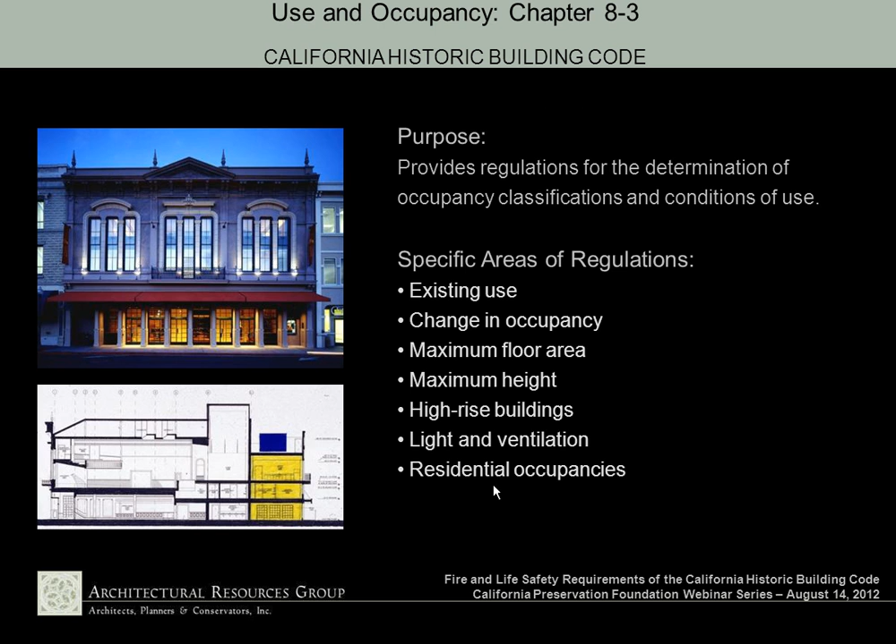Chapter 8.4 is fire protection, and the intent of this chapter is to look to the life safety of occupants in terms of fire separations, rated walls, and that sort of thing. And the specific areas, perhaps the most important, have to do with requirements for fire resistive construction. These are made much more flexible, both in terms of exterior wall requirements and the requirements for 1 hour construction.

1 hour construction can generally be not required, provided that there's an automatic sprinkler system installed, that there's an approved life safety evaluation to evaluate the actual safety level of the building, and that other alternative measures are approved by the enforcing agency. In other words, the fire resistive requirements that would be required by regular code can be adjusted based on evaluation and concurrence with the enforcing agency, provided there is an automatic fire suppression system. Similar flexibility related to openings in fire-rated systems.

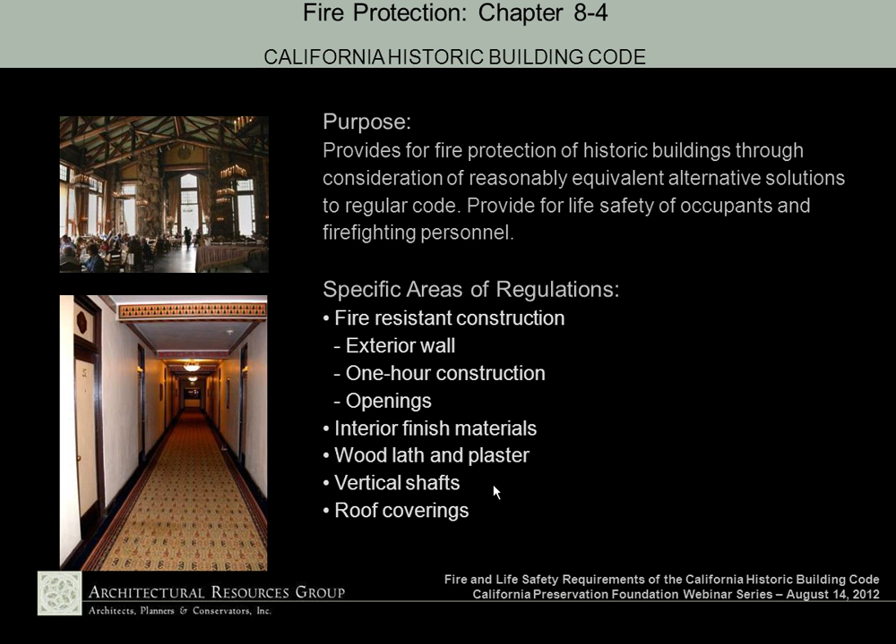There is another section, actually referred to as other technologies, and this is an important element because we've gotten much more sophisticated in our ability to model fires and to do computerized modeling of egress paths and patterns. And the code recognizes the use of these technologies as a way of understanding how the building will actually perform when it's burning or when people are trying to get out of the building.

So in situations where you have some sort of unique characteristics to the building, the code will recognize some of these other methods for analyzing the hazard. Recently, we were able to use fire modeling systems in looking at the Ahwahnee Hotel. And while they didn't actually change the ultimate solution, which was to pretty closely meet requirements of regular code, it did provide quite a bit more information about how the building was going to perform in a fire. So these technologies are important to think about as you work on historic buildings.

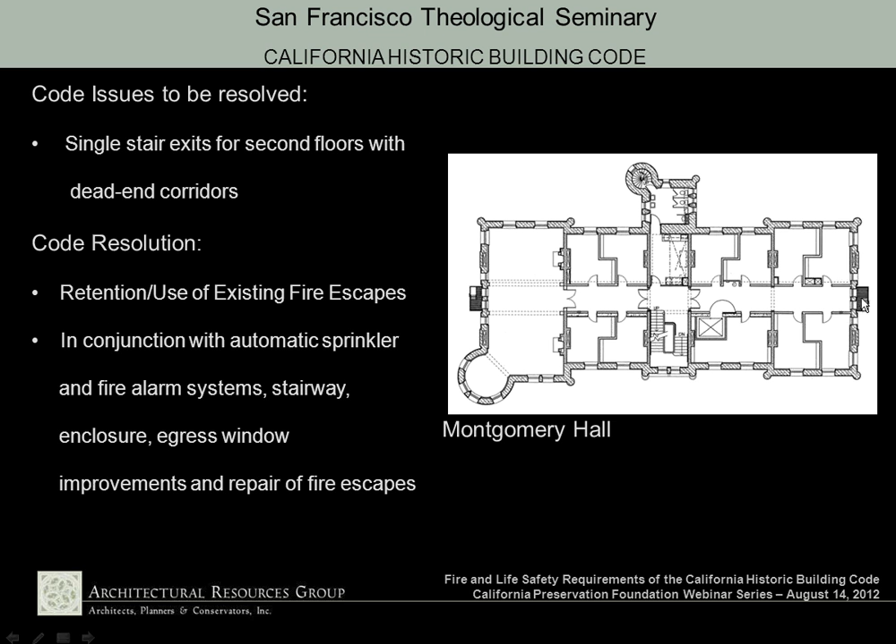add enclosing doors on magnetic closers, which would allow the main stairway to be enclosed in the case of a fire, and add improvements to how one got on and off of this fire escape.

So these are the fire escapes. They're pretty nondescript. It would be nicer if they weren't there, but our opinion ultimately was that this was actually the best solution for the building in terms of both historic fabric and life safety, and actually not incidentally cost.

The corridors had wood wainscot. These are doors on magnetic hold opens, and at the end of the corridor are two double hung windows. One of the windows was reworked to be a casement operated door. We kept the sill at the sill height, added exit signs, and this provided an adequate means of egress to the fire escape.

In conjunction with that and the enclosure of the stair was treatment of the guardrail, adding a freestanding guardrail extension and adding code-compliant handrails to the outside walls.

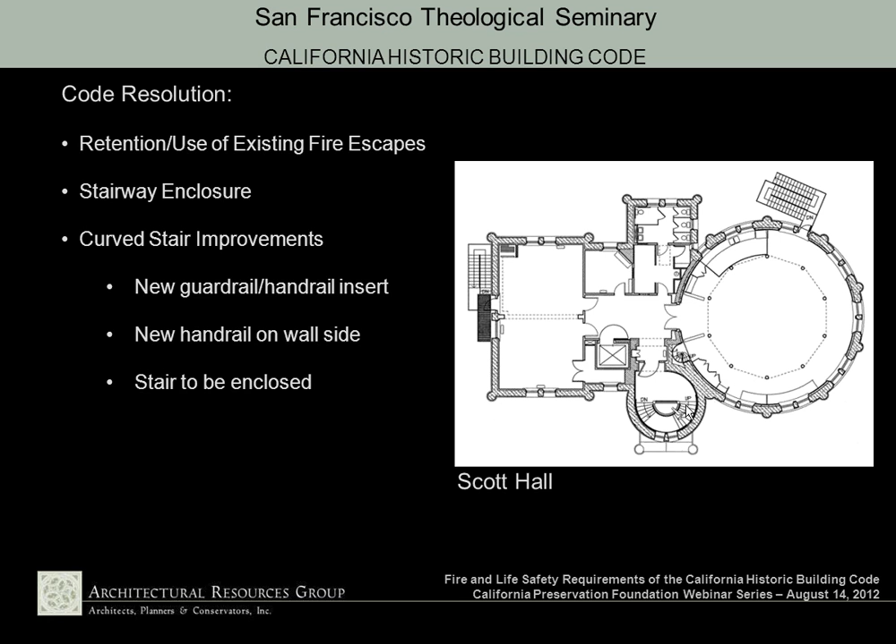We chose to leave them in place. In fact, they provided exit capacity in the right locations. And then enclosed the circular stair again with a magnetically held open door, full sprinkler system, full fire alarm system, and then improvements to the guardrails and handrails to make the stair a safer path.

This is a view of the assembly space. It's actually a student lounge. And the changes that were made to one of the windows to allow for access to the fire escape stair. And the curved stair itself went up 2.5 stories.

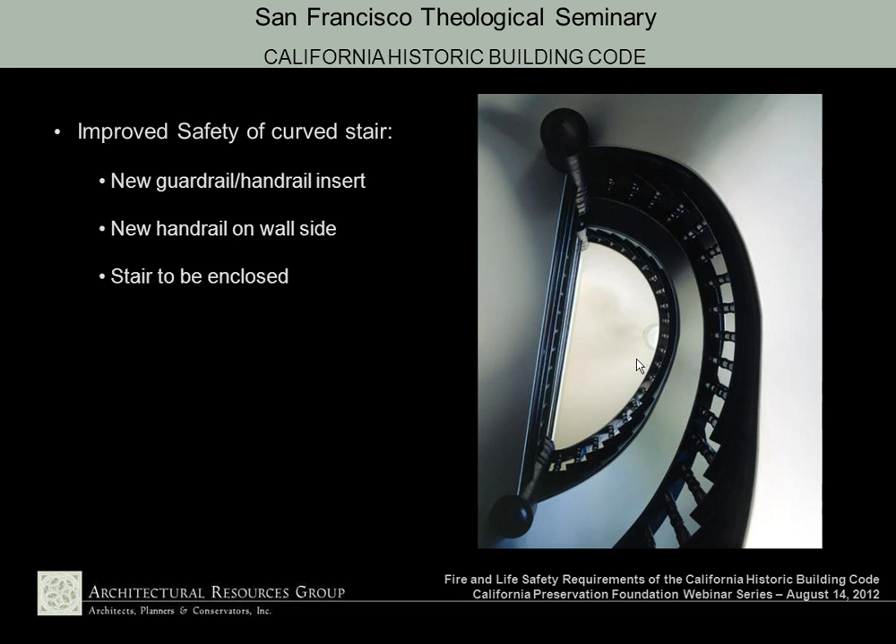And again, a freestanding guardrail extension was added inside the historic stair. So the historic balustrade was essentially unchanged, and a new handrail guardrail was added, which traces the path all the way down the curved stair.

This will be a similar story. Another project which really began with a seismic strengthening requirement. We really saw a number of very serious other code issues having to do with unenclosed open stair and egress corridors, as well as guardrail issues.

This is a plan view. So there was one open stair at one end of a long double-loaded corridor, and then a second stair 3 stories high. Some of the requirements decided on were to, again, enclose the stairways with doors which could remain open on hold opens until the fire alarm required the magnetic closers to close.

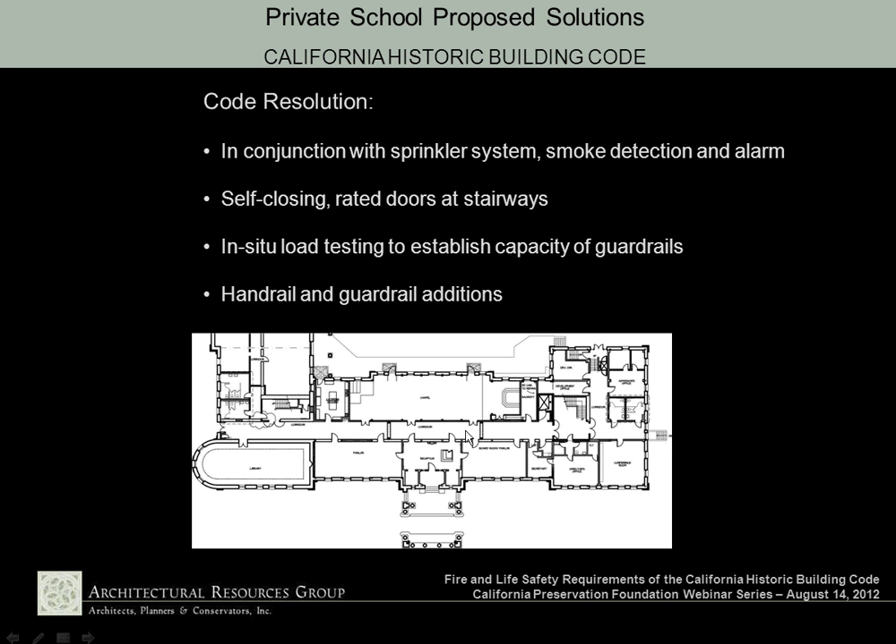This is an interesting story of the guardrails. I'll get to the photograph of that in a minute. And then making the guardrails and handrails safer. And then looking at how to treat what would normally be a fire-rated corridor.

This is a view of the stairway itself and the new doors on hold opens leading down the corridor. And here's the stair.

The corridor itself, and this is a fairly standard type solution, very beautiful corridor with glass transom windows, glass in the doors themselves. In the past, to make a 1-hour corridor, we would have ended up taking off the plaster and sheetrocking, taking out the doors and putting in rated doors, and taking out the transoms.

The State Historic Building Code allows these doors to remain as long as they are on self closers, and the transom windows are fixed shut. And the idea here is that the flame spread is not so much the issue because you have a fire suppression system, but smoke is still a big problem moving through the building.

And so it's important that these openings, while you don't necessarily rate them, be closed or be on closers. So that's a fairly common solution now under the State Historic Building Code for the requirements for rated corridors.

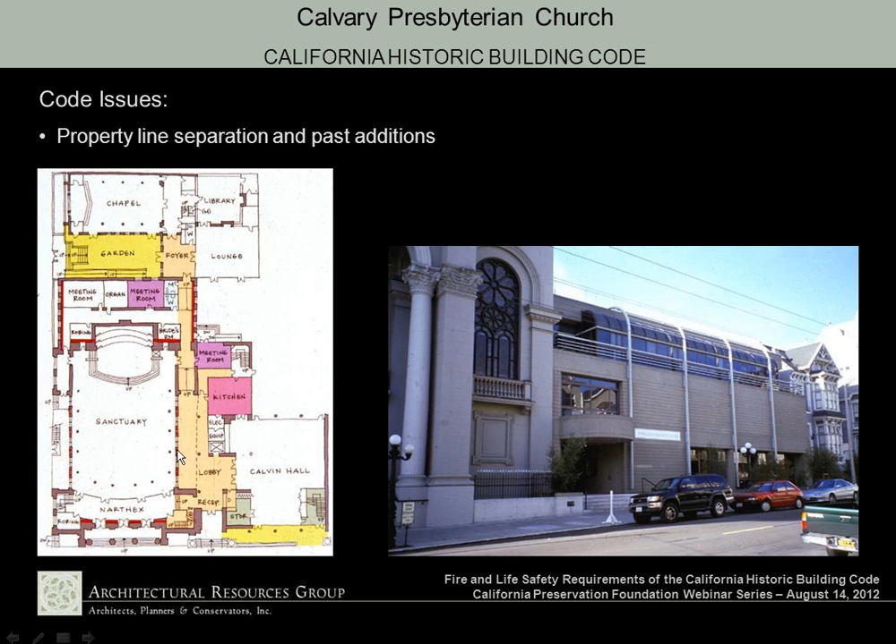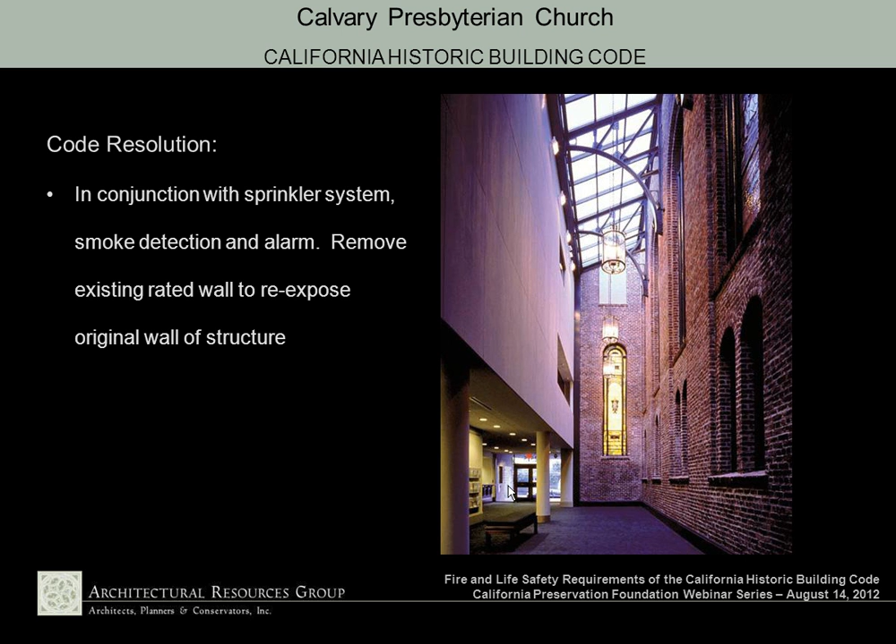Oh, I keep forgetting. I got more and more of these.

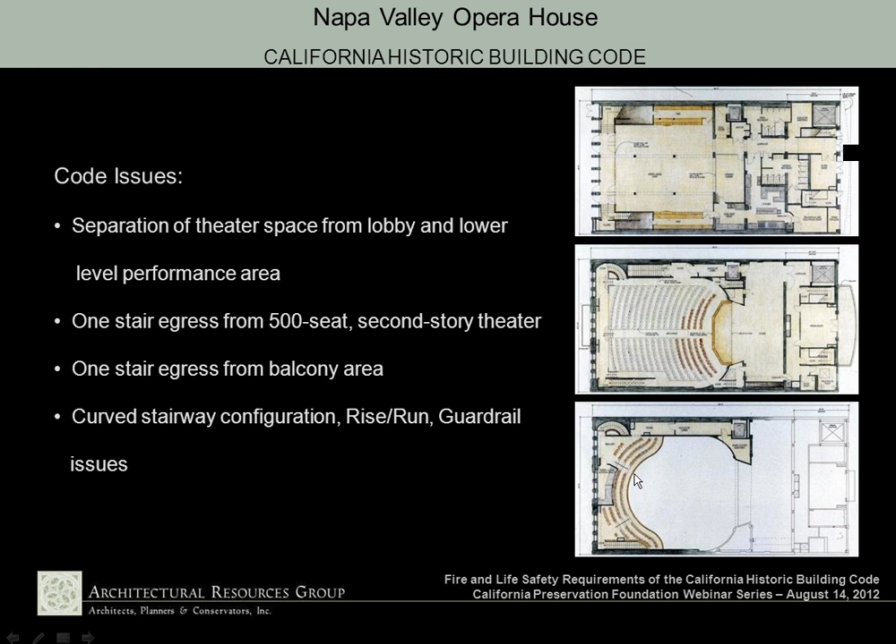Some things, this is where I was talking earlier about the comprehensiveness of some of these solutions, we really had to separate acoustically this performance hall from everything around it, but especially from the lower level lobby. So the process of making an acoustical separation, which is done in this case with several layers of sheetrock, allowed us to create the 1-hour barrier. Of course, everything was sprinklered.

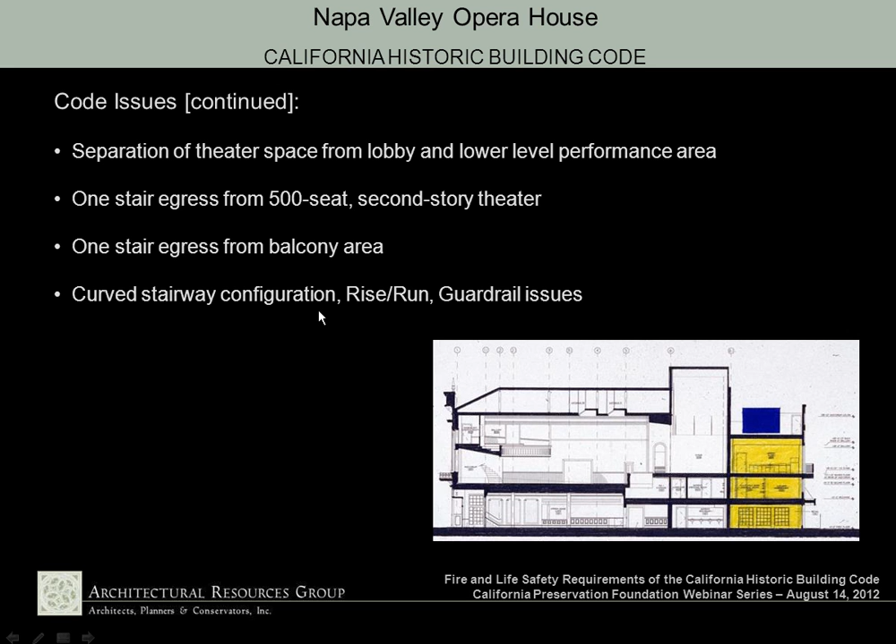We added a second means of egress, both from the balcony and a new egress stair from the hall. So in those areas, we really did not rely on a lot of flexibility from the State Historic Building Code. We really looked to create appropriate means of egress to augment what was there. And then reworking the curved stair so that it could still serve its function, but do it in a more safe manner.

A few other things. The original two-story stair, we needed again to do this acoustically as well, we had to have doors from the theater space into a lobby and then a second set of doors to get into the stairway. Actually, that's at this level, coming down. A second stair was added in the back of the theater that would come all the way down and egress through the main lobby and out into the public way. And a second stair also from the balcony level.

So even while we used the State Historic Building Code, because of the assembly occupancy, because of the number of occupants, and because of the tenuous nature of some of the egress systems, there was a fair amount of upgrading in this project.

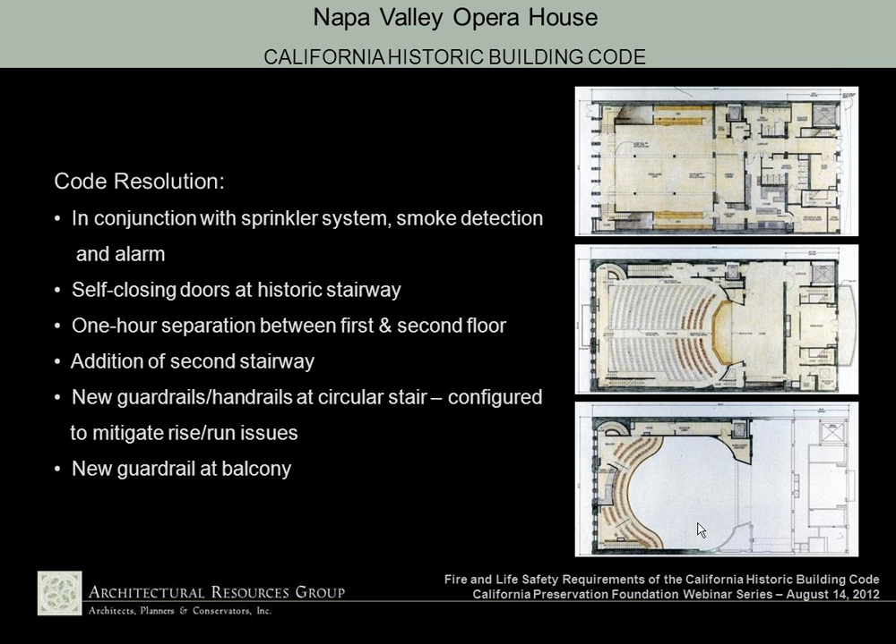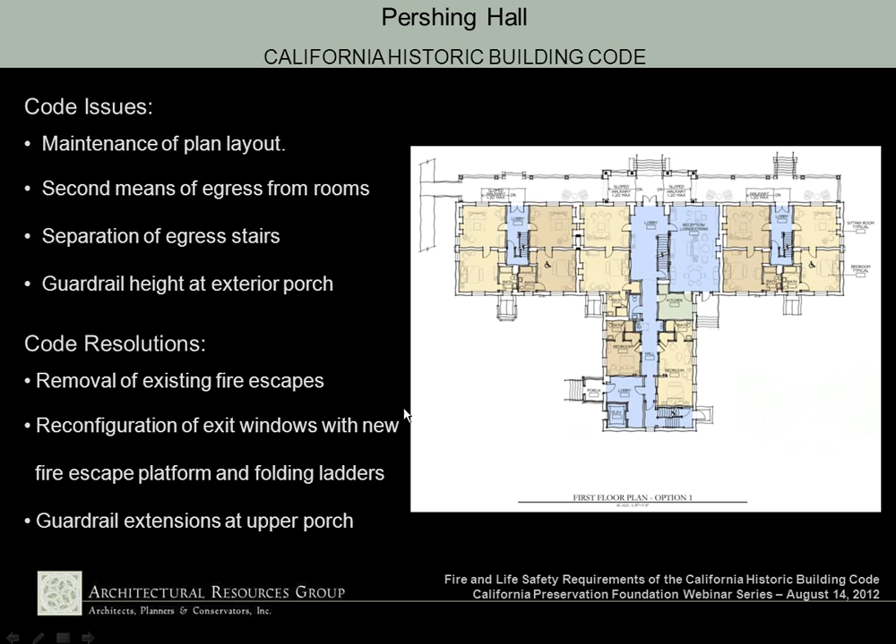One of the owner's programmatic requests was to get rid of that fire escape on the front facade and to rethink the ladders that existed in other parts of the building to provide a different form of egress. And so we removed the existing fire escapes and then rethought another way of egressing from the upper rooms.

And this is the rethinking that ended up as a solution, and that is to provide an egress platform at the rear of the building on the second and third levels from sleeping rooms, and adjacent to what is essentially a fire escape platform is a folding ladder. And these things are made by Jomy. That's what you see here on the right. On a day-to-day basis, they look like a downspout.

If there's a fire and you're on the balcony, there's a lever, and you push the lever, the stair comes out, the ladder comes out, and you egress the building. So this downspout-looking thing actually becomes a ladder which supports both this balcony and that balcony.

And the code allows this type of solution, but it's something that really needs to be worked through both in terms of the number of people who would be using it, in this case two rooms that it's serving, and what type of hazard you see in the building, and really working closely with the fire marshal to assure that they approve of the solution. In this case, it's a National Park Service fire marshal who is the AHJ.